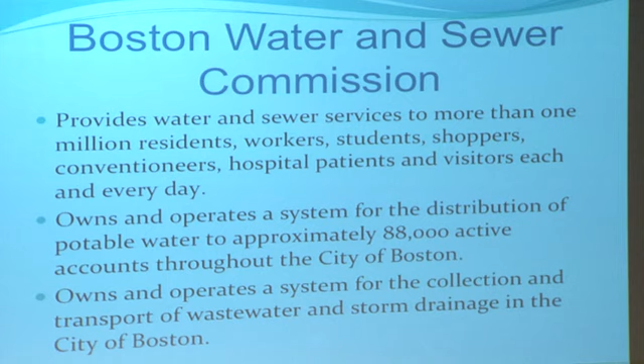This is the size of Boston's infrastructure. I just listed it all out. We're the largest ones around, but we're not that big compared to other major cities. But it is a sizable amount. One of the key things is the number of pumping stations. It's very strange for a city this size to have that few pumping stations.

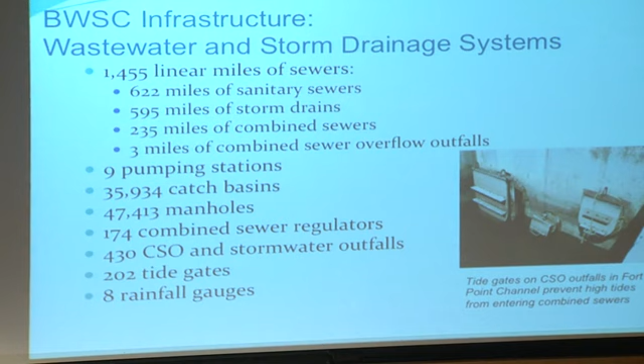The key is that only 4 of them handle sanitary flow. The other ones take care of underpasses. We have a big one for the South End. That's the biggest one we worry about. But we've got backup redundancy and then some more redundancy on the backup. So we're in good shape there. The underpasses, if they flood, go around them. Get used to it.

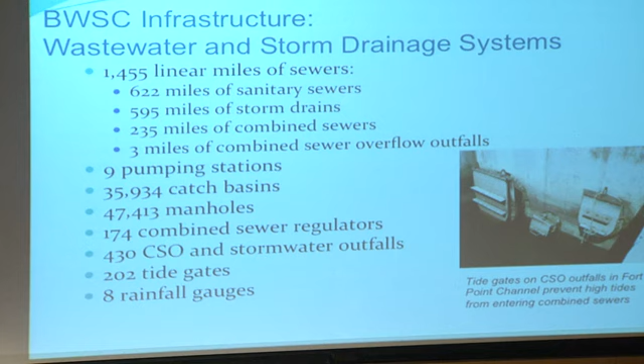You're going to have a sea surge on top of a rising tide, on top of everything else, because we're all using carbon. Things will change. That's a long time away. At least I won't be seeing that.

So, climate change risk. We decided to do a 3-year study of our wastewater system. We're just completing that in August. Part of it was climate change. There are 3 things we worry about: increased rainfall, increased river flows, since we're really an island with the Charles River and the Neponset River on both sides of us, which can come up and get you, and then sea level rise and storm surge.

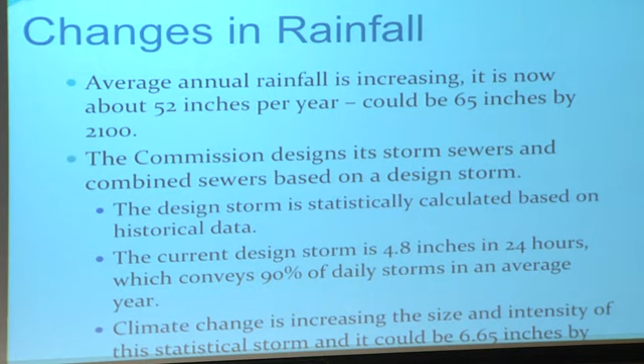And when people call us up and say, my car got flooded, we'll tell them, deal with it.

Monitoring rainfall: these are all the regional rainfalls. What's important about this is we've been watching it very closely. In 1996, we had some tremendous floods in Boston, so we set up a series of rain gauges in Boston. We do what most people don't do. We measure rainfall in 5-minute increments, which, when we set it up, everyone said was crazy. It's the best thing we ever did.

When we had particular flooding 2 years ago in South Boston, we couldn't figure out why, because it said there was 1 inch of rain in 15 minutes. That's what we would have measured. We found out that we had 1 inch of rain in 3.5 minutes, and that's why everyone flooded. If we used the regional stations, which we used to, we would have said, well, we don't know what happened.

So by collecting this data, which is all available to everybody about 20 minutes after it rains, you can go onto our website, look it up, and we publish that. In fact, we spoke with NOAA, and they're taking our data because of the 5-minute increment. And one of our recommendations in the study was that we don't have anything right in the middle. So we had to put one more rain gauge, and then we figured out that's where our headquarters are, so we have one on our roof.

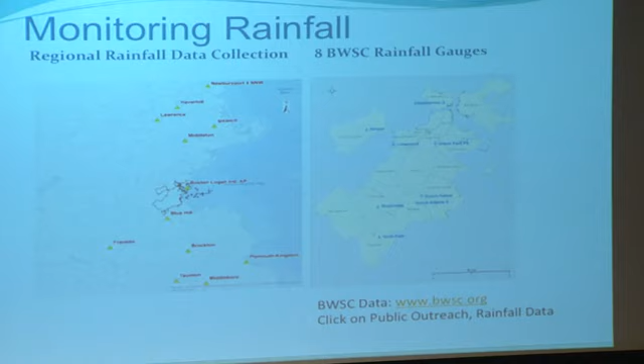Do we need to store some of the water? And one place we think would be fantastic to store water would be all these beautiful parking garages they're building in downtown Boston. They build them under the buildings. If we knew a big storm was coming, we knew we had a storm surge, and if we did our homework ahead of time, we could get all the cars out of there, and that's a nice place to put water. And you could pump it out if you thought about it ahead of time and put the pumps in there. So that's one of the things we're thinking.

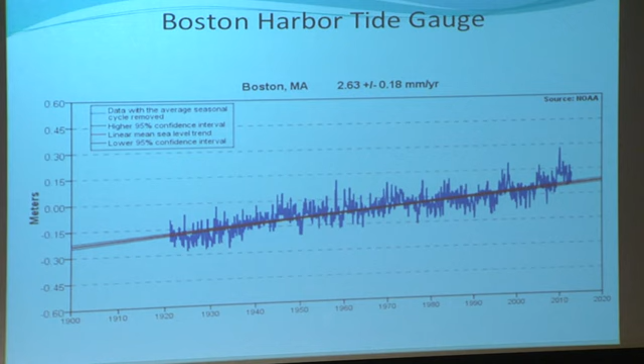Our expectation is, in a big sea surge, that the MWRA will, in order to protect their equipment, and we want them to do that because we want to have them start up after the high tide, they may just shut these things off, which leaves us to fend on our own. So we do expect them to protect their equipment, because their equipment, you don't buy one of those at Home Depot. They're very large, they take years to get. So it may be part of their resiliency plan to do it.

They're going to speak an hour from now. I won't be here. I don't want to hear what they're going to do. But I just want to let you know that's what we got.

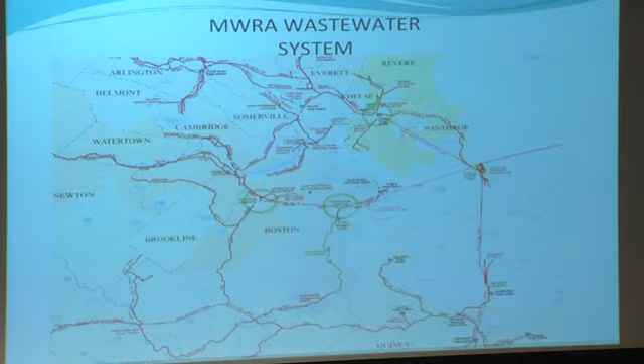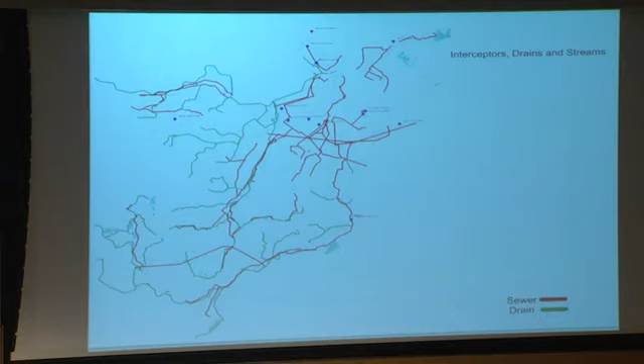This skeleton plan is just our sewer and drain system. And these blue dots are what's important. These are pump stations that we own. So we don't own any down here. It's a wonder the people that built the system built it by gravity. So we're not dependent if electricity goes out. The couple of important ones, Trilling Way in South Boston is the largest one. It's 6 MGD, which is a tiny one. We have the redundancy. We're going to build walls around it so it can't get flooded.

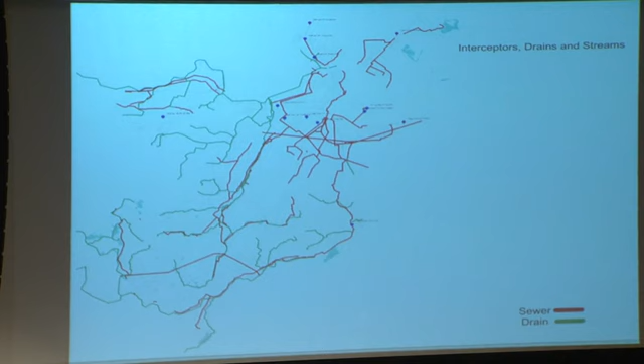We're going to build it so we can shut that down if a big surge comes so that the next day we can turn it back on. You know, if the flood's here and you got 4 feet of water outside, you probably got 4 feet of water inside. We just want to be able, the next day when the tide goes out, which happens 6 hours later usually, to get up and running. So that's our key plan, is to take the hit, but be able to get back up on our feet.

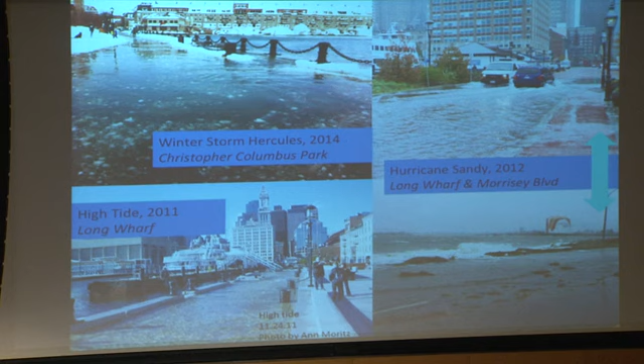That's the Chart House. And the reason I show you this is our sewer is underneath here. So any holes we have in the manhole covers, any place that it can leak, all that ocean wants to come into our pipe. And the reason for that problem is we can take a little bit of infiltration and inflow, but we can't take the ocean. We can't do that. I thought it was great one night, we were down watching them, and so the people could get out of there, they gave them green trash bags, and they got to walk out in green trash bags. Adapting.

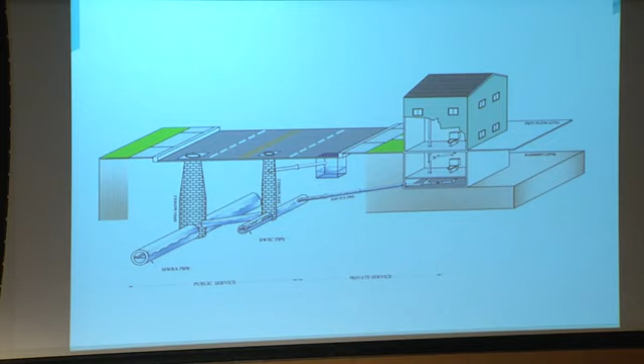This is just a quick little sketch that we show to some people. This is Boston Water sewer pipes. We tie into the MWRA pipes, and this is any building. The real problem in all the buildings in the city of Boston are people built in the cellars. They didn't just store their roots and wines there, which they're supposed to. They put bathrooms down there, and there's sinks, and there's all kinds of facilities.

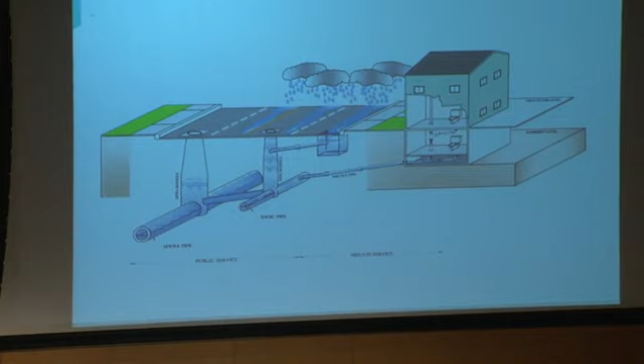And the problem with that is, most of the time we run and everything runs fine, it starts raining out a bit, and then it rains out a little bit more. And what happens is our pipes start filling up, and the MWRA starts filling up, and if it's a high tide, it gets even worse. And so as we start filling up, we start storing our water. And it stores because it comes back up the pipes, and it comes out of the toilets. And this is very common during the big rain events.

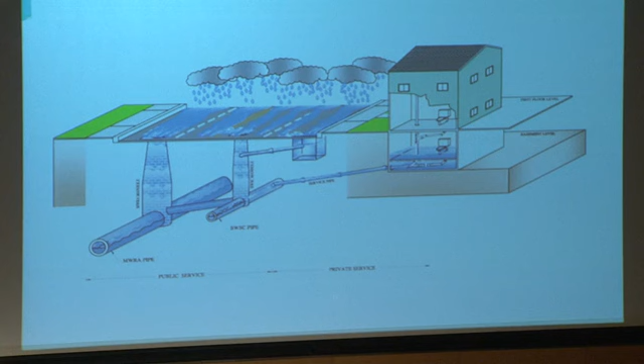And everyone says, why? And we go through this with them, and we keep explaining. So the harder it rains, the more we'll fill it up. Now, the good news is it can only fill up that high. So that's the only good news I give you.

The key on this, though, and it's something that the commission needs to do to talk to our citizens, there are devices. They call them backwater valves. They belong on the facilities in the basement. And they work if you maintain them. Every time someone gets flooded, they go out, they put one of these in, they sing hallelujah, they don't maintain it. So 3 years from now, that happens again, and we get to fill up the basement again.

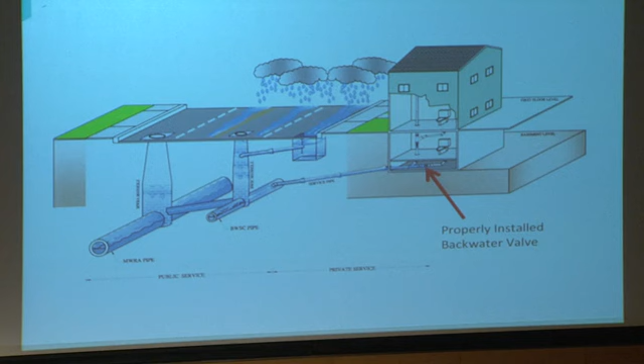The problem with the basement floodings, we've got to remember, if we flood out the whole city, if you do it in January, you can't buy enough oil burners, hot water heaters. There just aren't enough of them around. You've got everybody downstairs that got drywall. They try to dry it out, but they don't do a good job. Mold sets in. So major, major public health consequences, besides the fact that more than likely you got a little sewage mixed in there, so just letting you know.

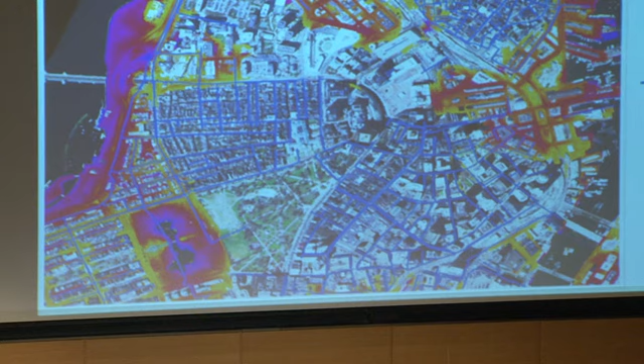This is a quick shot. The blue lines are our combined sewers, and one of the problems I show you on this is the combined sewers means that the catch basins on the street tie into the sewer. And if the ocean is able to get up and get into the combined sewers, it fills up our sewage, and therefore tries to get into everybody's home. So it's an attack from underground. It's what will happen. That's one of our big pushes. We're even looking at giving grant programs to get out there and help people install devices.

My recommendation to everybody is everything in the basement should be on a pump, and you should be taking that water, pumping it up high, and dumping it into the sewer. So there's no way that can get into your basement. People use the backwater valves, but the way to be sure is to do it that way. And they say, what if the electricity goes out? And I say, use the upstairs toilet. Or, if you're in an apartment, make sure you're friends with the people upstairs.

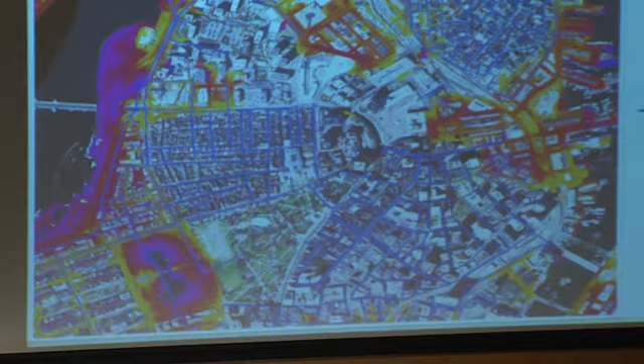So this is a quick run, an analysis that we did. It just shows the water in the edges, but a lot of our combined sewer is in good shape, and a lot of the stuff in the edges has been separated, so it isn't a factor. There are some, and we're going to take a look at it to see what can we do to minimize that impact.

This is one of the stolen pictures. Back Bay, this is Cambridge. I get totally lost in Cambridge, by the way. This is the nice city, by the way. A lot of very, very expensive real estate here. And it's so very important for us because how a city stays alive is expensive real estate, great values. You get the tax on the assessed values. That's how you keep cities alive.

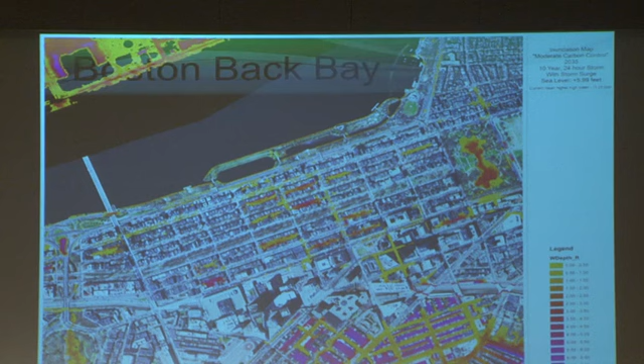But some of the projections show there'll be an issue if we overtop the dam or the river water's coming down too high. And so we're looking at that. And our analysis showed that with the surge, 5.13 foot surge, I believe is the number up there, we have flooding in the South End, but not that great of flooding in here. There is some, and these are the little alleys in the back of those homes. And there's solutions for those. You can build pump stations. There are solutions. We have a way out.

We're not going to go build them right away because we're going to be monitoring everything as we go along. We're not just going to spend money in case something's going to happen, because you know what happens then? You put it in, it waits 10 years. The day you turn it on, it doesn't run. That's what happens with anything. You buy a brand new car, put it in the garage for 10 years, it won't start.

There's another analysis we did without the surge, but it shows us that the intensity of the rainfall is still going to be a problem for us, so we need to address these things.

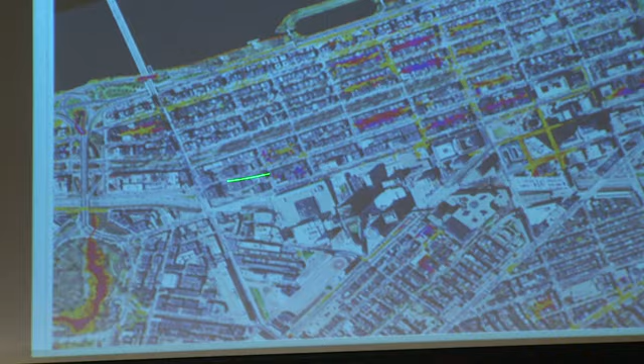So the way we're going to address them is we've got the models, we're going to each of these sites, we put little devices in there, and we monitor it. And when it rains out, we check our gauges: how hard did it rain? We check this and see how high the sewer came up. Because just because the model says it works, it doesn't always work that way. These sewers are really mysterious things, especially when they're working and they work right.

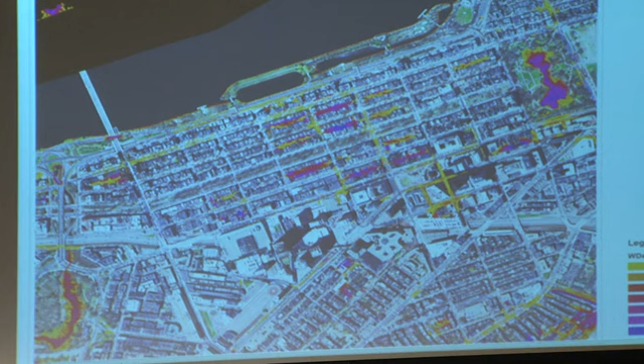This is the entire city. As you can see, the problems move to the Innovation District. That's the theme here. That's Cambridge. This is the downtown part where you see the big flooding.

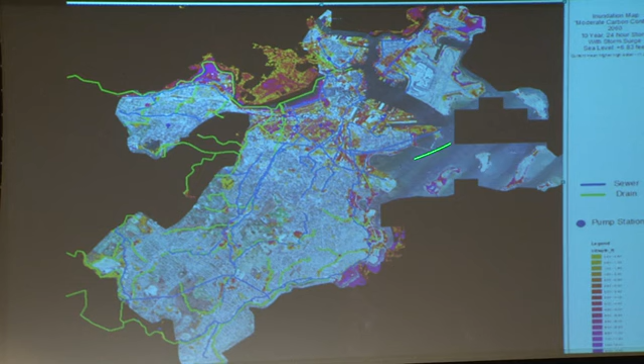We also have flooding sporadically up in West Roxbury and these areas, and our plan up there is to hold the water. We can hold it in the Arnold Arboretum. We can build little dams on the pipes that take those brooks. So we're looking at all the topography so we can hold back water up there and bleed it into the system later. Whether it be a day or two, it wouldn't matter. So we have some areas in Dorchester that we worry about, and of course, East Boston's got a bit of an issue.

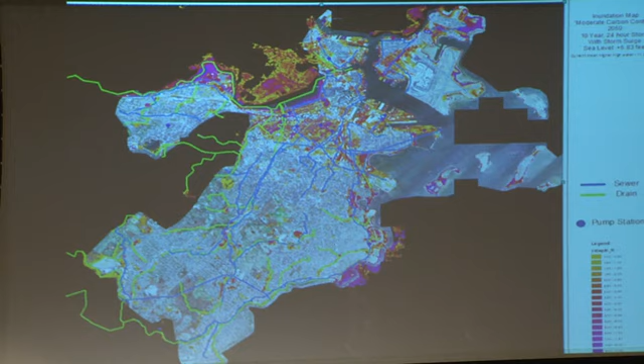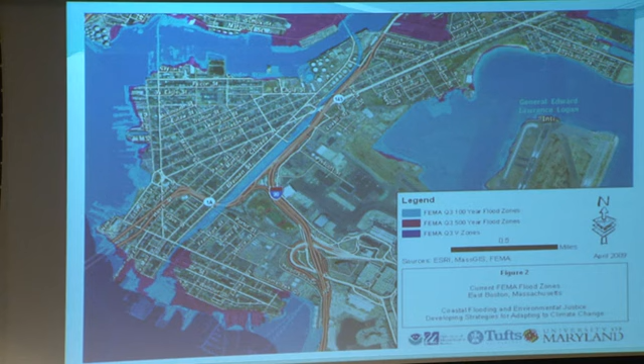These are some other slides we borrowed. That's the FEMA flooding now. That's the Greenway and the part of East Boston. This is on a separate study that several are working on. It has a bit of an issue when a tide comes up and it's raining hard. And again, this is a combined sewer system. That means all our sewers are taken out. The good news is if you're living up here, you can still flush. The bad news is that's where you flush, because it comes back out of the ground.

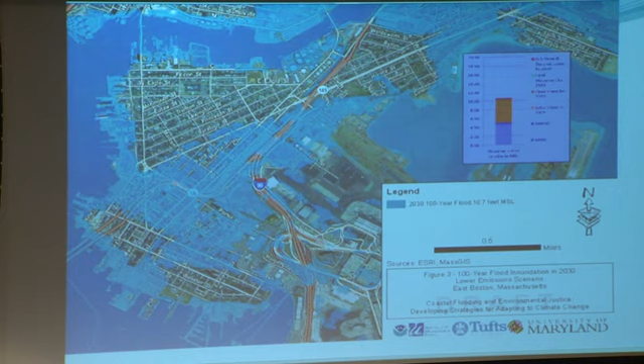Major public health issues. And people say, yeah, it's water. You know, sewage is sewage, and to have your couches and everything you own covered by it. Then you've got to do all the debris management. And people have to live in between this. Good news is the water's fresh and clean. Told you that. And that's the 2030 scenario, but again, we don't know. And that's another one we show.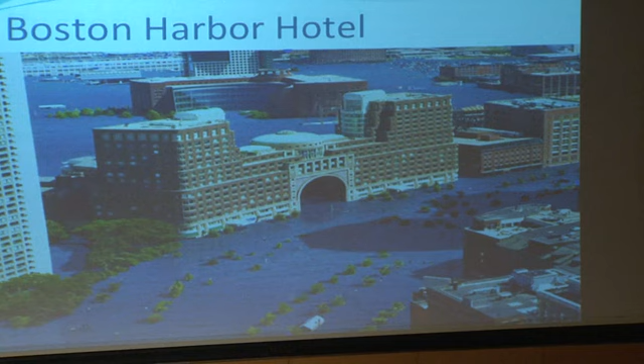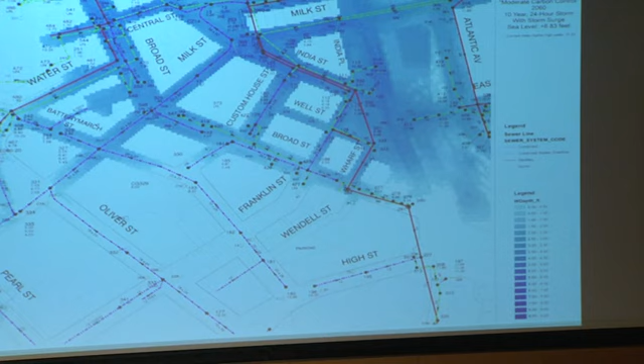This is what could happen in a flooding scenario. And why that's important: this is downtown. Here, the purple lines are combined sewers. That's where the street is connected into the sewer system. We would simply flood out our sewer system. We'd send it down to the MWRA, who, depending on the scenario, probably has just shut themselves down. So all the water wants to go into everybody's basement.

And that's the problem. We've got to communicate with the public. It's not our fault if it gets in your basement. You've got to do something to protect yourself. And so we need to make sure they understand, we all take steps, and be ready for the next day to get up and running to make sure our systems work.

Unlike electric, unlike communications, all our pipes get wet. They carry sewage. So it's no big deal for us. We're not going to get hurt. If we just take care of 4 pump stations in the city, we're in good shape. MWRA takes care of 7 or 8 of their facilities. The system can get back up and running. Not that there won't be damage.

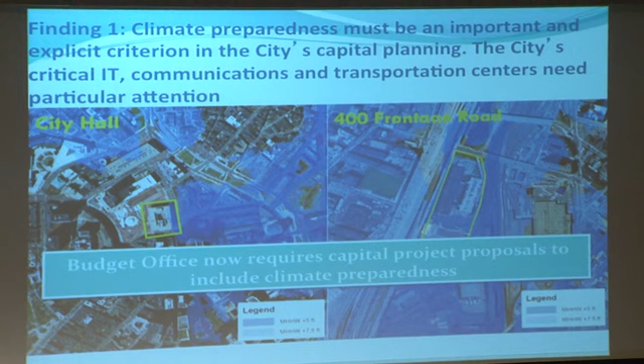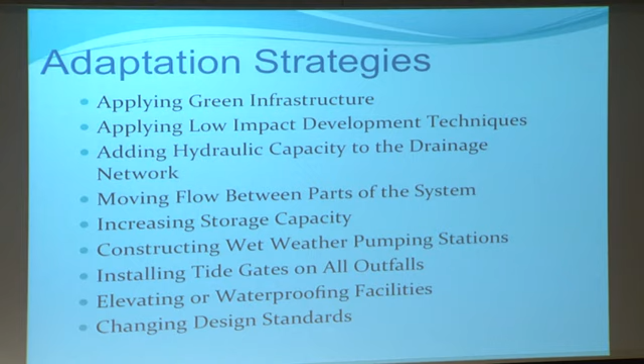The Budget Office requires everybody to look at them. That's our framework. It's the same as everyone else will have. Take a look at it, assess the risk, study it, and implement. I'm not going to read them. Adaptation strategies, all the things we're going to do. We'll be starting them in next year's CIP. Our commission has given us the money we need to start the process. This isn't a money problem. We just need to do it and spend the money wisely. It's public money. It's your money.

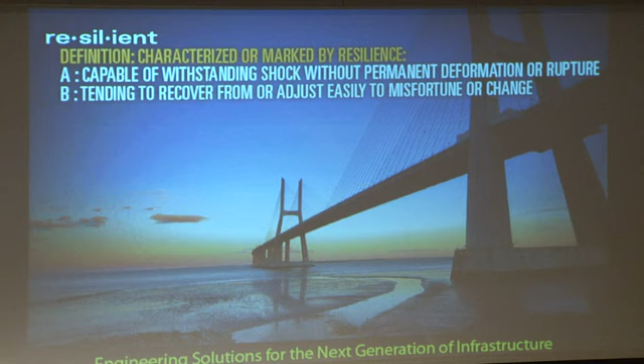So this is what we want to have for the poster. We didn't think a sewer would be that sexy. So resilient, and that's what it means. That's what it means to us, and that's what we want to do. And if we do it right, we'll be in good shape. This is the poster we don't want to have hanging up there: if you think our problems are bad, wait till you see our solutions.